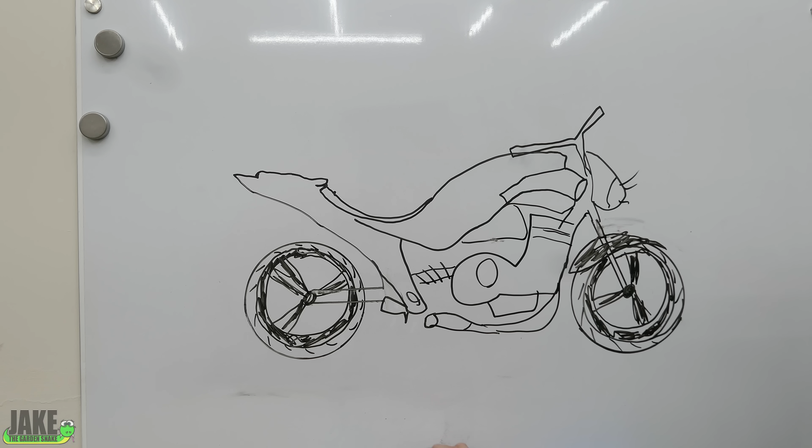Let's actually talk about how I plan to do it. Here, I've drawn on my board an MT-07. As you can see, this is the MT-07 in standard form with its wheels, motor, and everything in the correct places. Anyone who's been around for a while has seen that I've taken my MT-07 off-roading quite a bit already, like an idiot.

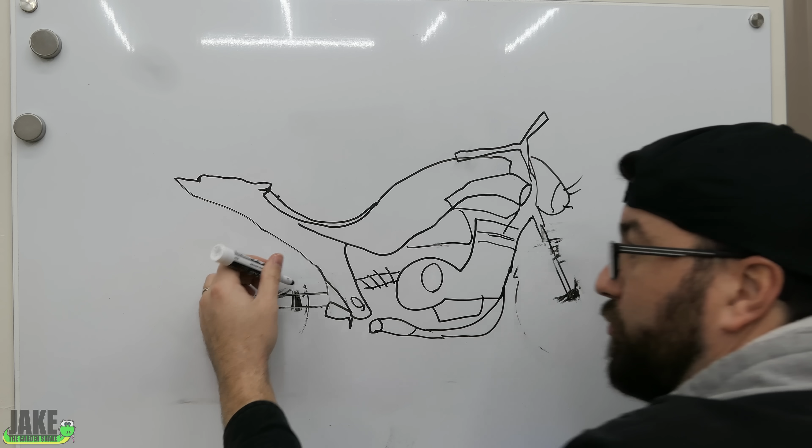One of the things I'm always worried about when I go off-roading is the actual rims themselves. I'm always worried I'm going to break one of these cast rims, so we're going to get rid of those. We're going to be putting Excel rims on this thing. They're still going to be 17-inch rims, but we're going to have legit Excel rims - a big 5.5 on the rear, 3.5 on the front.

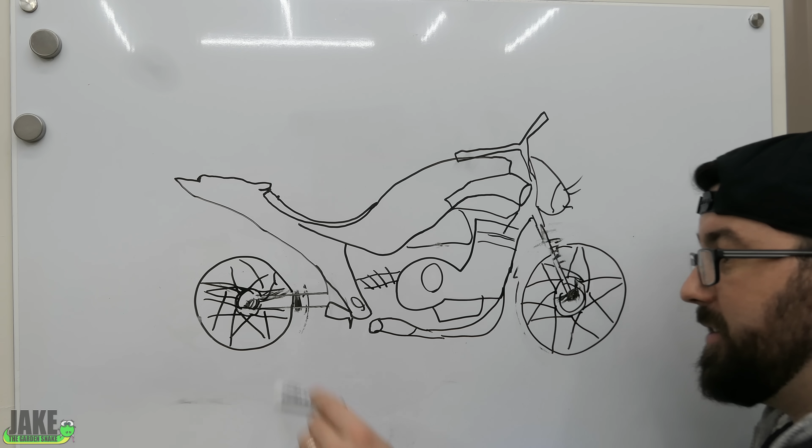We're still going to have our dual disc brakes, and everything's going to bolt up to them all the same. This type of rim will be a lot stronger, as well as have a little bit of flex to it. With a whole other set of rims, I can leave street bike tires on and just fast swap between them.

The next thing's, of course, gotta have knobbies. Giant 180 knobby right here. Look at this thing, dude.

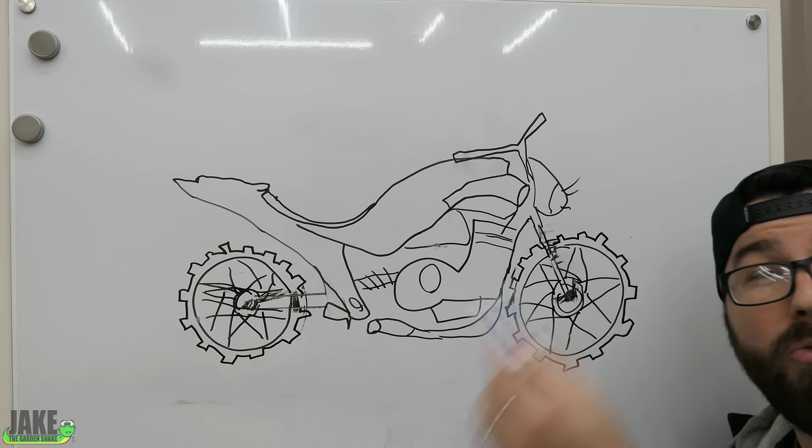One of our other major concerns with this bike is our low ground clearance, and the fact that the oil pan is the lowest hanging thing on this bike. So we've got another solution for that: a big stunt cage thing on here. It comes all the way down, represented in red for no reason whatsoever—it's not gonna be red—and it's a super legit, not effing around skid plate. This skid plate is connected to our stunt cage.

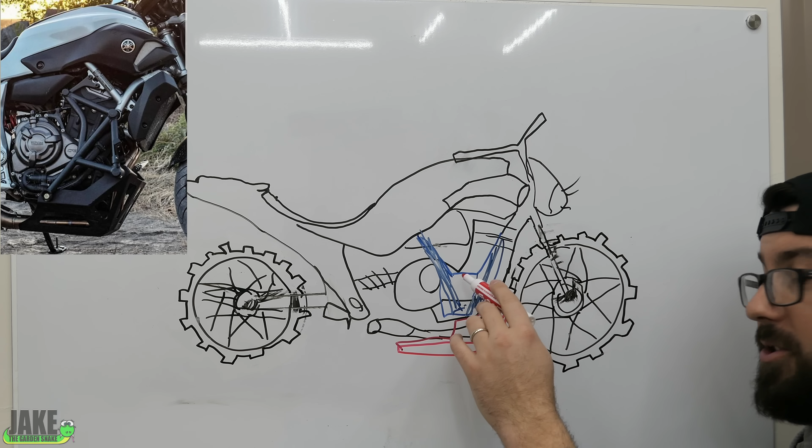We're gonna be putting much taller bars on here so that we can stand up and ride. That's how bars look, shut up. Oh yeah, headlight—an insane LED headlight that's coming. We're gonna put a little dirt fender on the front.

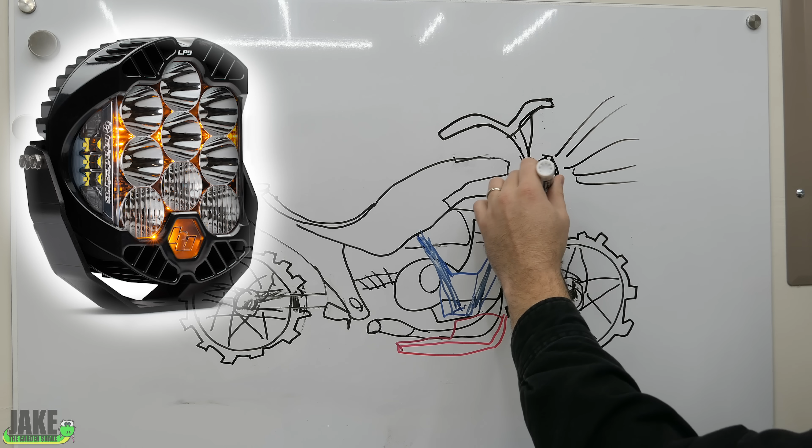Seat and all the plastics on the back—nope. We're gonna have a much flatter seat coming across here. The back here is actually gonna be a rack to bolt things to. There's going to be a sub cage going around the back of the bike here, and Rotopax on the back. Probably a big bag across the back here.

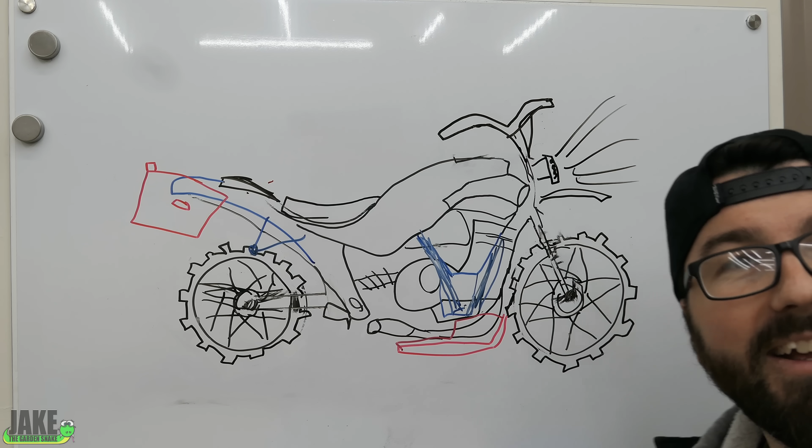Yeah, that's it. Yeah, I'm not an artist, but this should give you an idea.

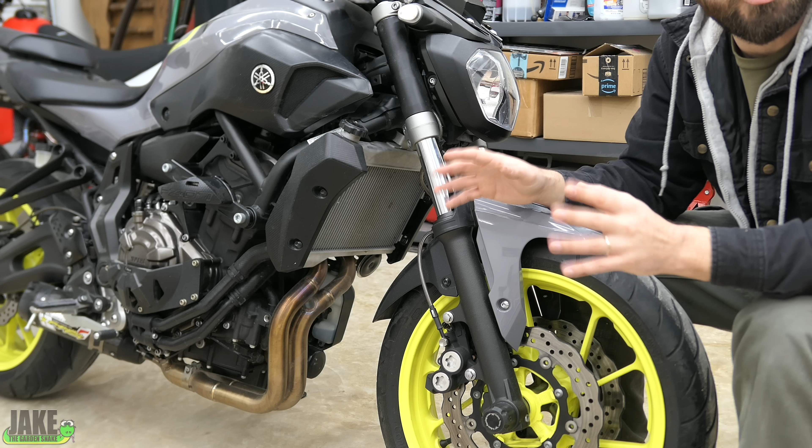So far, everyone I've explained this to, their first and biggest question is, what are you gonna do about the suspension? The suspension is pretty tricky for two main reasons, and I'm gonna try to make this as brief as possible, but if you want to skip past that, this will be the time to skip to. Two major problems—let's talk about the first one, which has a lot to do with cost and time.

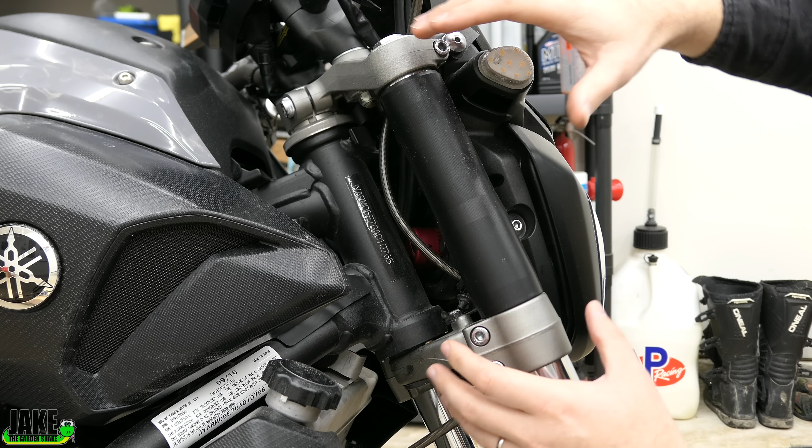If you just wanted to swap in a different set of forks on here, that's not necessarily too hard. You'd probably just get a whole front end and wheel, maybe off of a 450 or something. It doesn't even have to be a Yamaha—it doesn't matter what brand it is, because we're gonna have to be custom fitting it to this bike regardless. You could use the triples it comes with, and you'd probably just have to do a custom stem in the middle here. Somebody with a lathe can usually make you one of those.

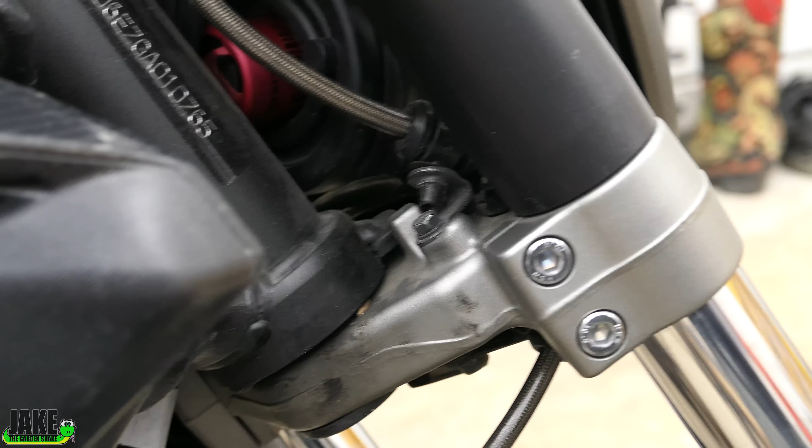You can make that work, and you actually see a lot of custom builds rolling around at shows with front ends like that. In the real world, there's a problem with those, and it usually has to do with things called bump stops—the things that keep the bars from turning so far. Just about every bike has a different setup. On the MT-07, there's a little tab on the frame and a point that the lower triple contacts. On the XR, for instance, we have a point here and here that make contact. Basically every bike is probably slightly different some way.

You really need to make sure that's correct, otherwise the bars flopping all the way over can bang into the tank or crush the wires. If you're just building a pure show bike, this isn't a worry for you. But since I know this thing's gonna get dropped a lot once we turn it into a dual sport, we need to have a proper bump stop setup on there. And pretty much at that point, you're talking about a custom set of triples.

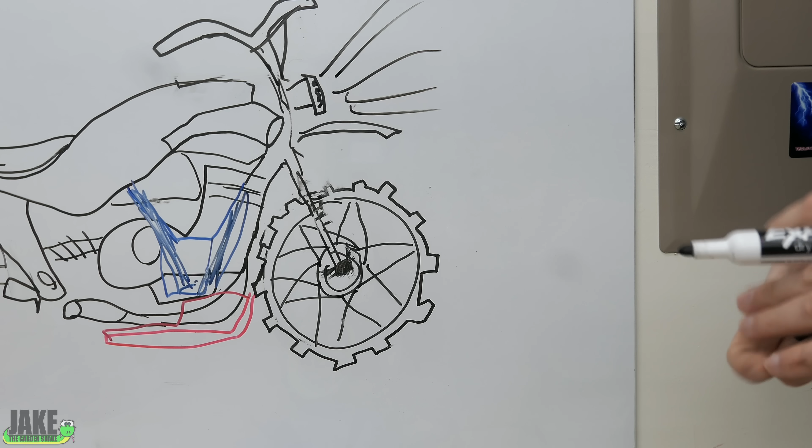And I don't have a CNC machine, and I don't know how to work one if I had one anyway, so that would be paying somebody to basically build a set of those. So remember, we have to get a whole front end, wheel, and triples off of another motorcycle. Maybe we can find a decent set in good shape for about $1,000 for all that. Probably a little optimistic, because if you want it in decent shape—not something that's been sitting out in a barn for years—it might cost you a little more than that. But let's just say we found a decent set.

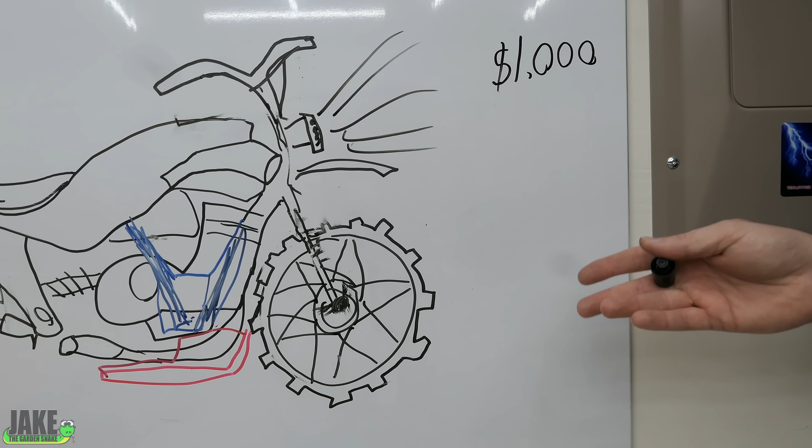You're gonna have to get that suspension custom tuned and valved, and this is not gonna be off-the-shelf parts. Taking the suspension to a place that's gonna pull it apart, look it over, figure out what they think it's gonna need, then custom order parts from someone like Race Tech—that's gonna be at least $1,000. Then you're also gonna be going to a single rotor on the front, and this bike's probably a little heavy for a single rotor, so I think you'd have to do something like we did on the XR and put a big race setup on there, like a supermoto race brake setup.

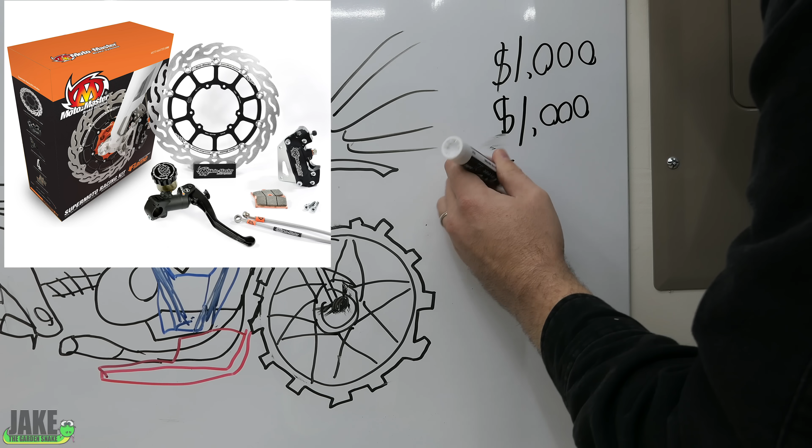That will run you about $1,300. And then of course there's that upper triple that we have to get custom made. I have no idea how much that's gonna cost. I would be having to go to somebody that'd be willing to take something like that on.

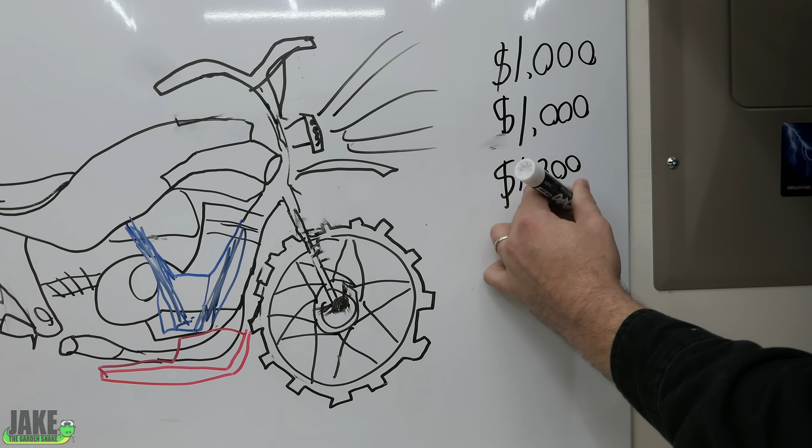Let's pretend we could find a machine shop willing to help us, and we do it for $500. When you're trying to have one built ground up that's never existed, that number's no way. I don't even think so, but I'm just trying to come up with something. At least $3,800 to do the front end.

Unfortunately, things don't get any easier for the rear end. Probably I'd just swap in a swing arm off of something like a WR. Maybe, but you gotta remember, this thing is designed for a big 5.5-inch rear rim, so the offset of your chain to the back sprocket are gonna be pretty far off. You'd probably have to get a custom hub made and extend it out. You'd have to cut the swing arm, maybe.

There's a handful of different ways I could think to do it. They're all very complicated and expensive. I think actually the easiest thing would be to modify the factory swing arm, maybe extend it a little bit. You have to do it right. You don't want to do bolt-on extenders for something you're gonna be off-roading with. Those things are kind of iffy as is.

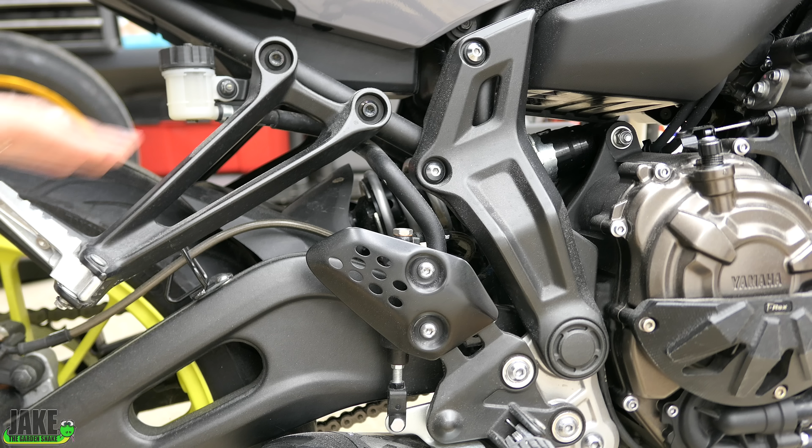The shock is running horizontal on this bike, and it's not a super long shock. We need a long vertical shock with a linkage system down below the bike if we're gonna actually get a lot of travel out of it. That means we need to cut up our factory frame, engineer our own linkage system around the battery boxes. It's just a lot of custom work. There's not really an easy way to do it.

You'd have to find someone with the machining capabilities and the time to do all this, and it's definitely more complicated than the front end. You also need to get a shock for the rear custom valved and sprung.

We said it was $3,800 to do the front. It would probably be more than that to do the rear, but let's just pretend it was also $3,800 to do the rear. So something like $7,600 to do this. A lot of money — that's as much as the bike cost.

Again, I know there's fast, easy ways to do this. I know there's a lot of people out there that slap front ends on like that. But if you want it to actually be done right and be durable, that's the only way I would accept it.

And again, that's all just problem number one. Problem two is that once we did all this, we'd lose the capability of swapping it back over. I'd love to be able to swap the other rims back in and use this like a normal machine. So, nope, we're not doing that.

What I lack in suspension travel and ground clearance, I'll make up for with a skid plate. I don't have all the parts here for this yet, so don't kill me if it's a few weeks until the next build video. A lot of this is me waiting for other parts to show up, and some of these parts aren't just sitting on a shelf — it's one of those things where it gets ordered and then somebody goes and makes it.

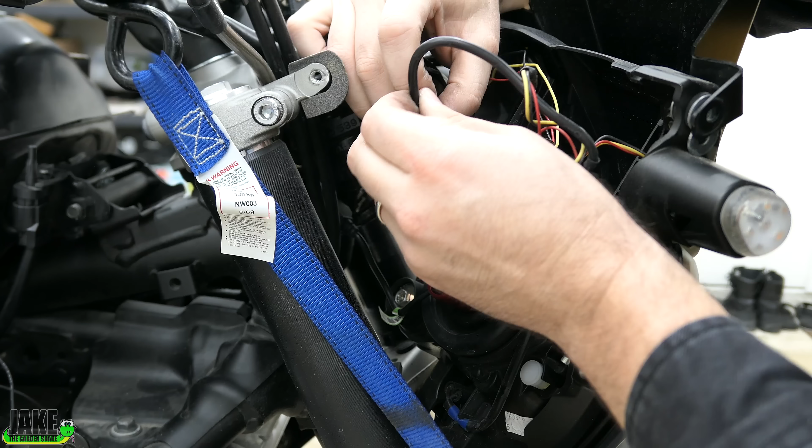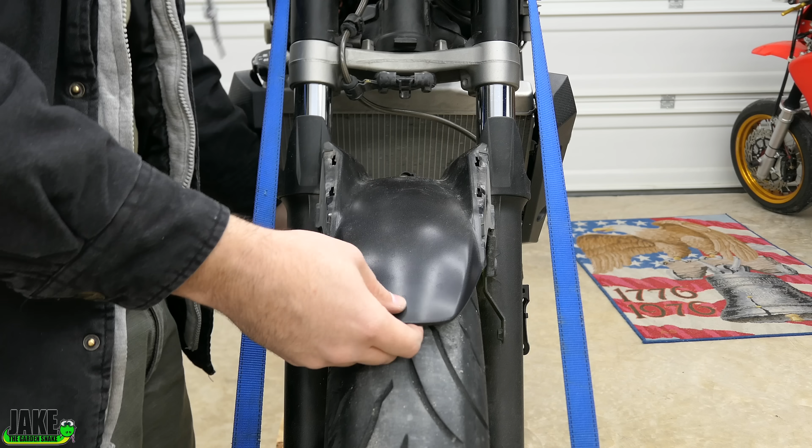Pretty good start there. We could tear some more things down, but I want to keep it as a roller as I can. There's no reason to take the bars off or anything yet.

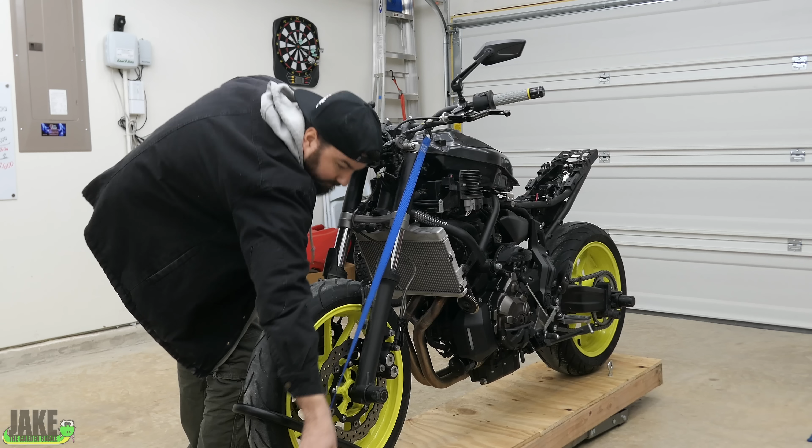It's so hilariously light right now.

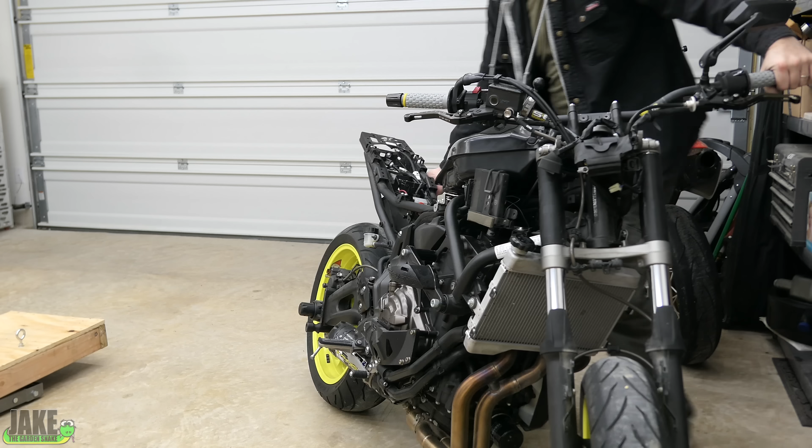Well, chilly out there, isn't it? Honestly, I'm excited looking at it like this. I'm like, yes, this is gonna be sweet.